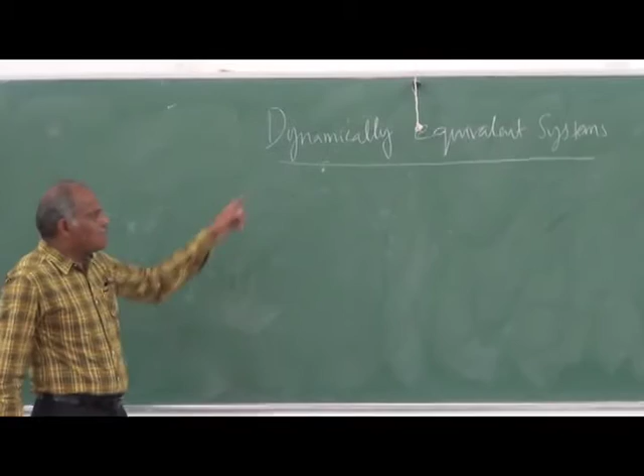Now the next topic, I will be taking a few topics which may appear disconnected, but I will connect it later. One of the important concepts is dynamically equivalent systems.

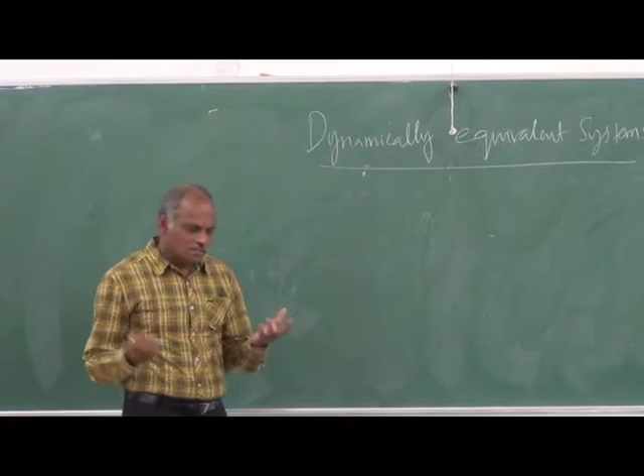But before discussing dynamically equivalent systems, we should philosophically understand what equivalent systems are. When you say something A and something B are equivalent, A is something, B is another thing, when you say two things are equivalent...

So suppose on the weekend you are traveling to your hometown, you have booked a train ticket, you got a lower berth in S4 coach, your friend got a lower berth in S5 coach. Are they equivalent or not? Is it going to differ in experience or time? You have a lower berth, the other person also has a lower berth, but the coaches are different, or even in the same coach you can have two lower berths. If there's a possibility of exchanging the ticket, will you get any benefit? No. So you can say both are equal.

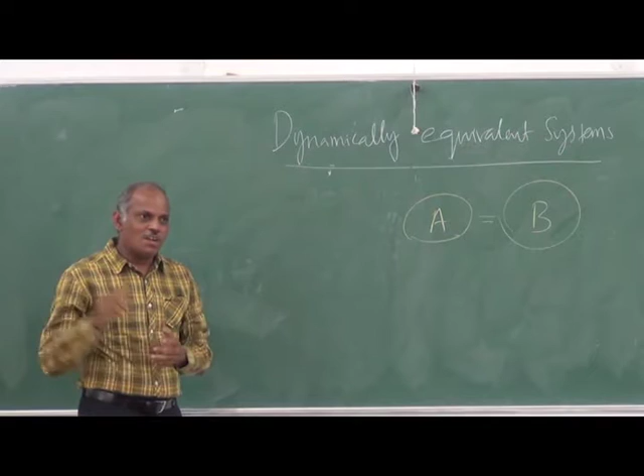But in the same train, if one of you has a second AC ticket and the other has a sleeper class ticket, will you exchange it? No.

You want to travel from here to Chennai, different modes are there. You can go by car, by train, or if you are crazy enough, by air. The half hour travel has a check-in time of 2 hours, and after check-out another half hour. So can you say traveling by all these modes is equal? From here, Trichy, to Chennai by different modes, are they equal? No.

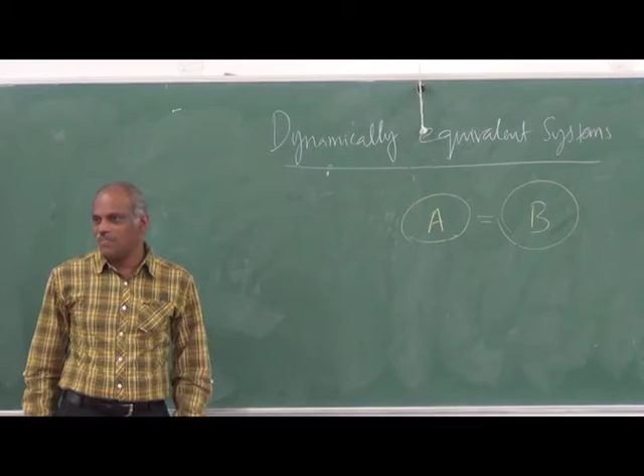Then when do you say they are equal? You have a bank account in State Bank, you can have a bank account in Canara Bank, a savings bank account in each. Are they equal or different? They are equal because they offer the same net banking facility, the same interest rate. When they offer same facilities of operation and same interest rate, they are equal, unless one of the banks goes bust, which nobody can predict right now.

So when you say two systems are equivalent, there is a philosophical basis, only then can you say it is equivalent. Your seat in mechanical engineering at NIT and production engineering at NIT are not equivalent. Metallurgy at NIT is not equivalent. Or mechanical here at NIT versus mechanical at Karaikal are definitely not equivalent.

But getting a seat here, whether your seat or your friend's seat in mechanical engineering, same section, is the same. So you can say two systems are equivalent by looking at something: you give some inputs and you have some output. If they are the same for both A and B, you can say it is equivalent.

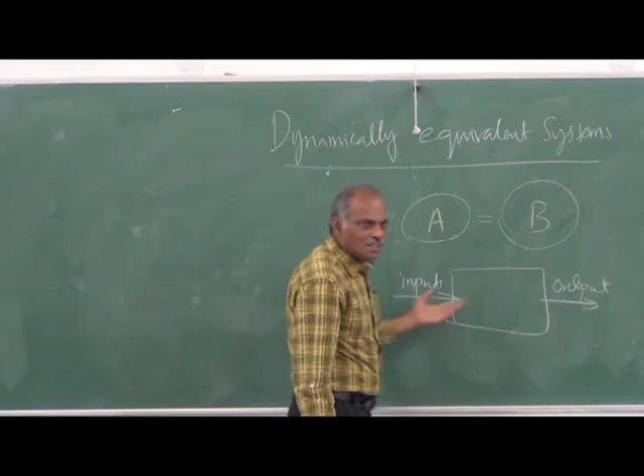Traveling by train, sleeper class, lower berth, in the same coach or different coach, are equivalent because the travel time is same, the money spent is same, the comfort level is same. So for the money you have paid, the outputs are also same, you can say it is same. So State Bank savings account or any other bank's account, if they give the same interest rate and same operational benefit, they are the same. So you can say two things are equivalent if whatever you give in and the output you get are the same, you can say they are equal.

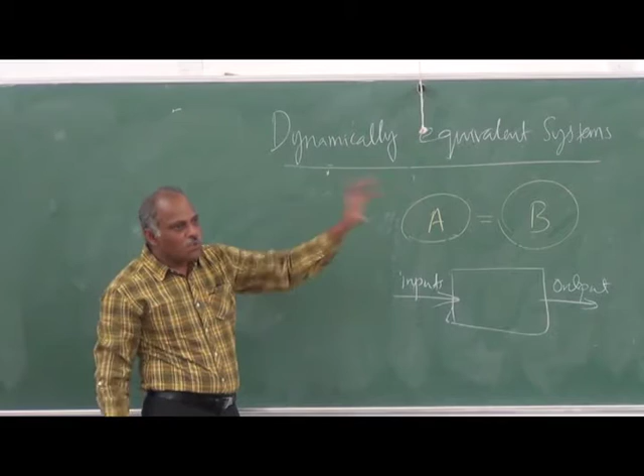So after getting a degree here, you get a job say in Maruti. A person who studied in a self-financing college also gets the same post in Maruti. Then you can say the effects are the same. So as per the effect, whatever degree you obtained and that person obtained, the outcome is the same. So equivalent systems are the ones which, for a given input, produce the same output. You can say they are equivalent.

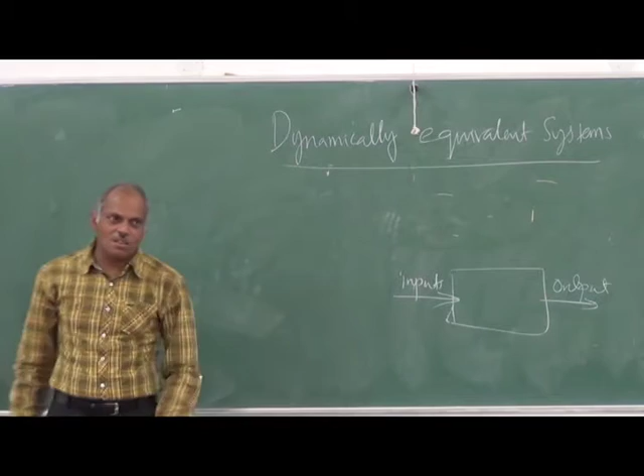But here we are talking about dynamically equivalent systems. When can you say two things are dynamically equivalent? Coming back, for a given input it should produce the same output, that is the dynamically equivalent system. Suppose I take some awkward looking rigid body and I have a nice looking model of this, these two are to be dynamically equivalent.

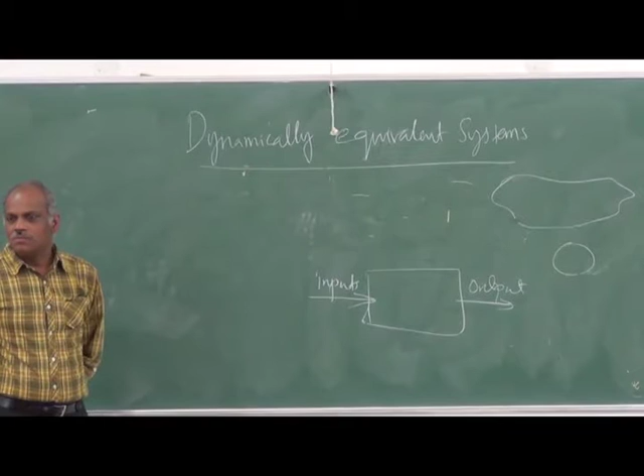For a given input, it should produce the same output. So in a dynamic system, what is the input, what is the output? Forces. If you apply force to either of the bodies, it should produce the same acceleration, then they are equivalent. For example, in translation, forgetting about other things, if you're looking only at the translation aspect, 1 kg of steel with 1 kg force applied will produce the same acceleration as 1 kg of cotton.

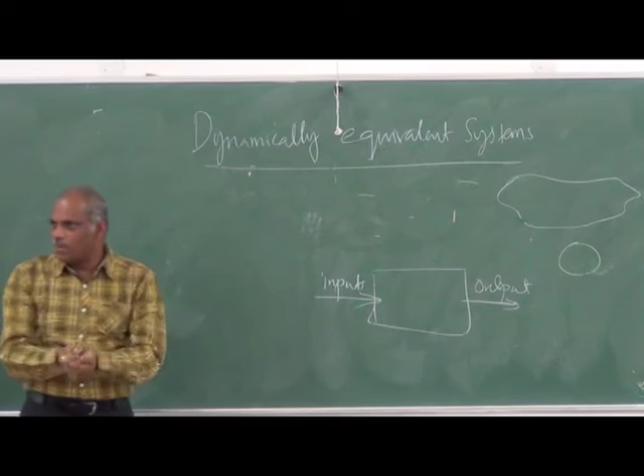1 kg of lead or 1 kg of gold, applied by 1 kg force or 1 Newton force, will produce the same acceleration. Then all are equal. 1 kg of cotton or 1 kg of this thing, dynamically they are equivalent because for a given force it produces the same acceleration.

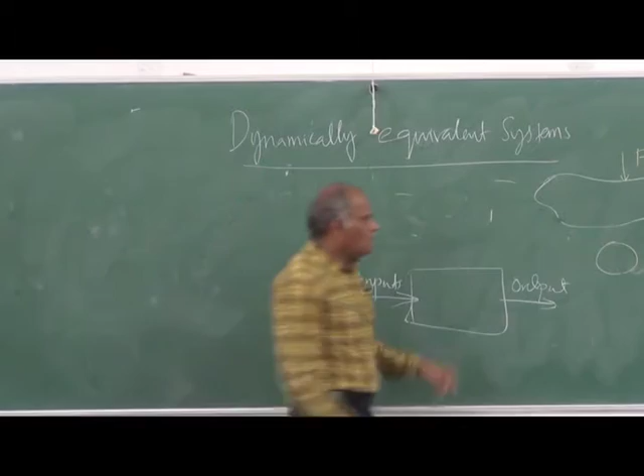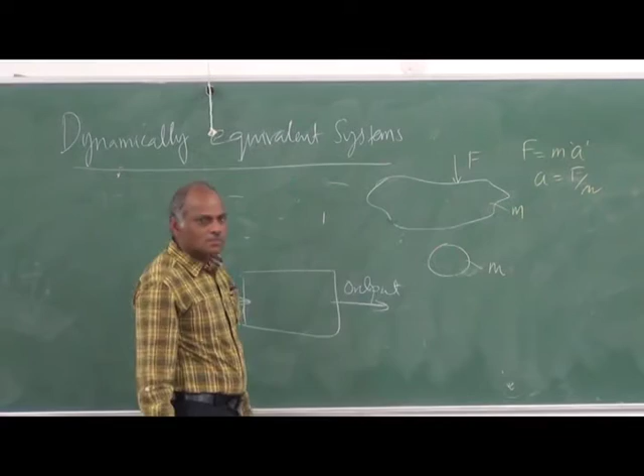But if I apply a force to this rigid body, knowing the mass, F equals ma, I can find the acceleration. A equals F by m. So if the mass of this is also the same, then you can say these two are dynamically equivalent as far as translation is concerned.

But another thing, does the point of application of force matter or not? It matters, because if I apply the force through the center of gravity, it will only suffer translation. But if the force is applied elsewhere, away from the center of gravity, it will translate as well as rotate.

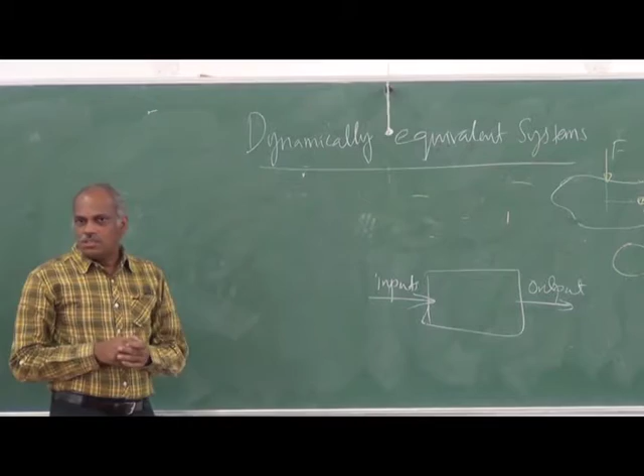So the effect is, for a given force, through the center of gravity it produces only translation, but away from it, it produces translation and rotation. So if this is to be equivalent to that, its center of gravity also should be the same. So with a single mass concept it is not possible. So what we do is think of two masses.

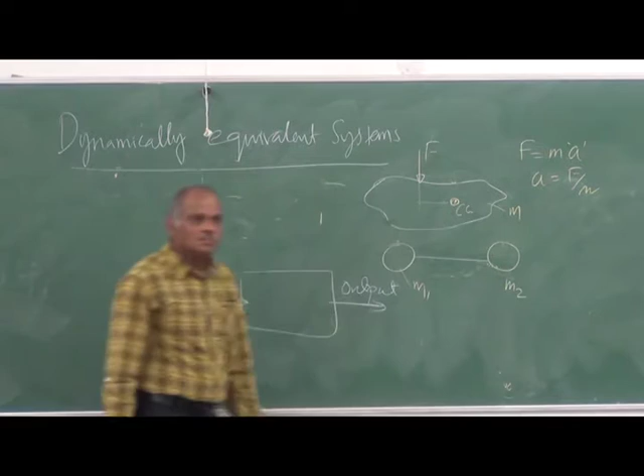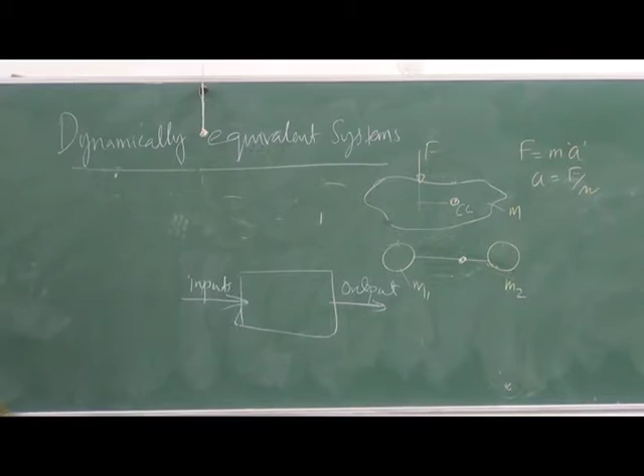They are connected like this. Then if their center of gravity and this center of gravity are the same, it will produce the same effect — if I give the force through the center of gravity for this, also through the center of gravity for that. If it's slightly away, at the same farther distance, it will produce the same effect. So if a force is applied on this, it should produce the same linear acceleration.

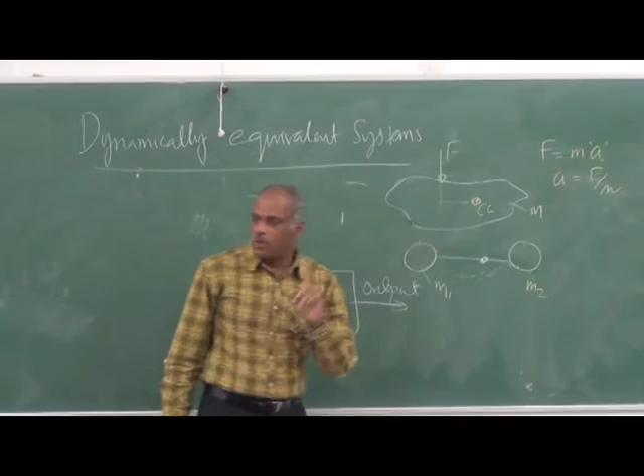That is one point. So therefore, if two systems are to be dynamically equivalent, their masses should be same. So we can say the first condition is that m1 plus m2 should be equal to m. Then only it will produce the same linear acceleration for a given force.

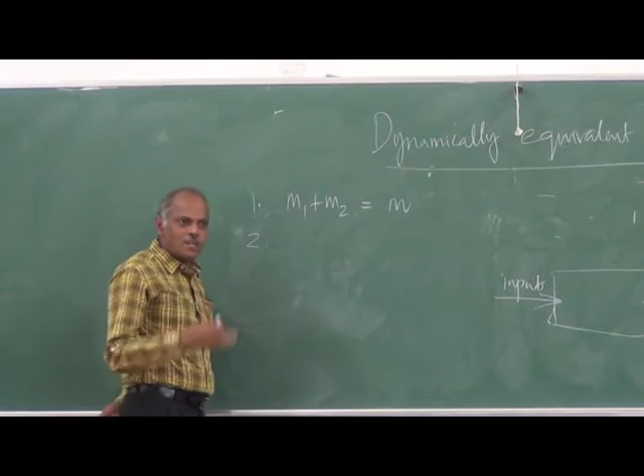Then the second condition is the center of gravity should be the same. So if I take this distance as h1 and this distance as h2, m1 h1 should be equal to m2 h2. Then only the center of gravity will be the same at this point.

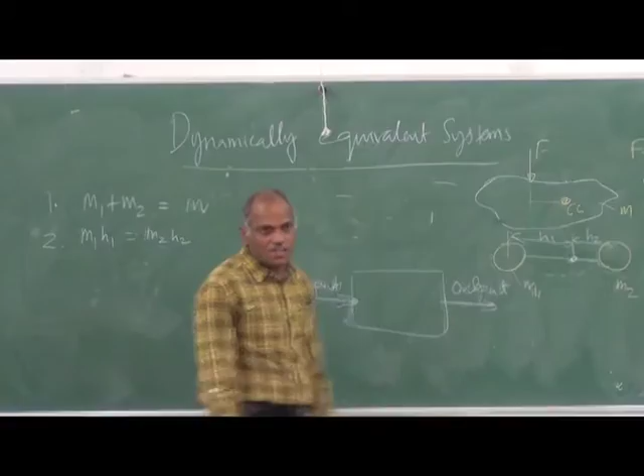Then the third condition is that when it is displaced away, there will be a force acting through it and there will be a torque. For the torque, it should produce the same angular acceleration. So for a dynamic system, the outputs are linear acceleration and angular acceleration. The inputs are force and torque or anything.

It should produce the same linear acceleration and angular acceleration. If you produce the same angular acceleration, the moment of inertia through the center of gravity for both bodies should be the same. So the third point is m1 h1 squared plus m2 h2 squared. Because this is a concentrated mass, the radius of gyration can just be the distance from there. So m1 h1 squared plus m2 h2 squared is equal to mk squared.

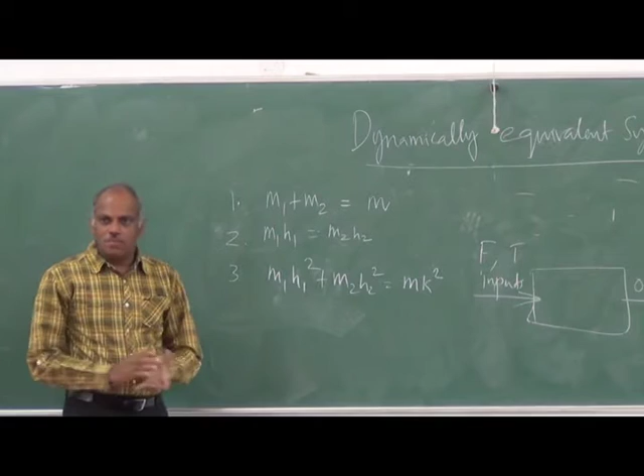If these three conditions are met, then both the bodies will produce, for a given force, the same linear and angular acceleration. Therefore, they will be equivalent.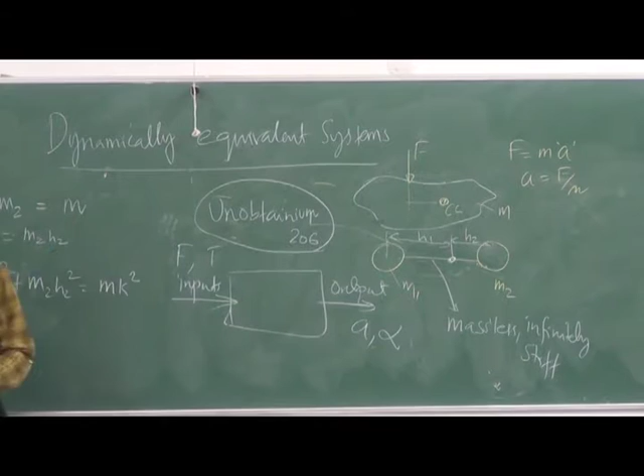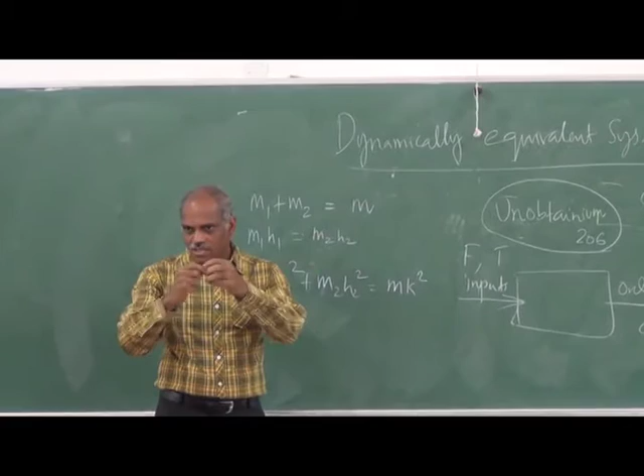To dynamically model an equivalent system with two simple balls, it should be connected by a massless, infinitely stiff material. Which material has such a property? It is unobtainium 206.

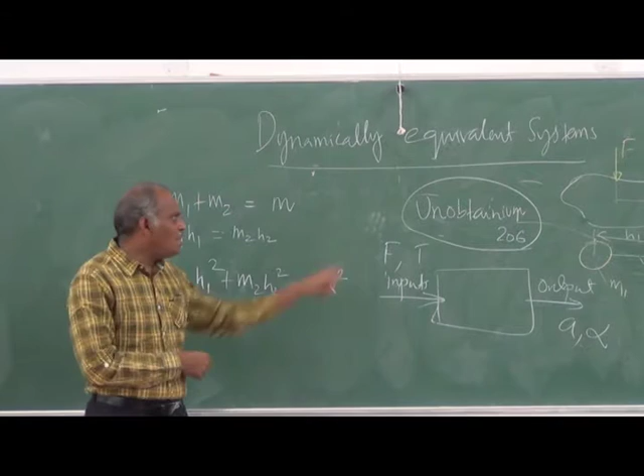What is unobtainium? It is a fictitious material used in fiction. Suppose I want a material which has zero mass and infinite stiffness — then you can say it can be obtained by a material like this. So in fiction, if you want to depict a material with ideal qualities, it can be stated as unobtainium.

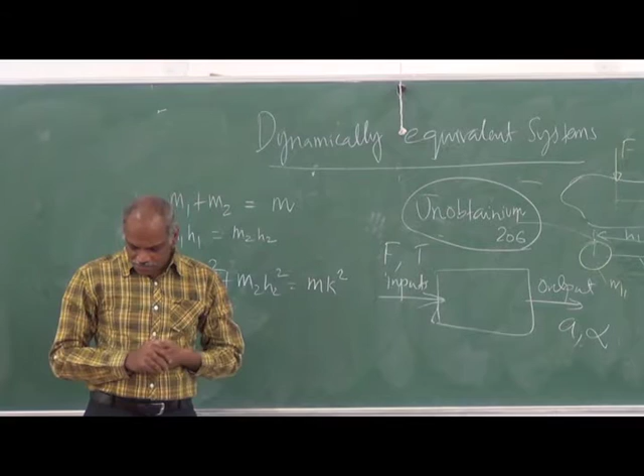Basically, an unobtainable material. Interestingly, this is the name given for a material which would have superconductivity at room temperature, to solve the energy problem of Earth. There is a movie by James Cameron called Avatar.

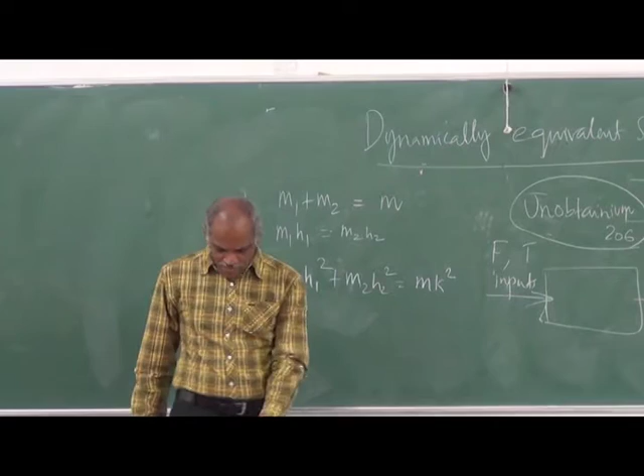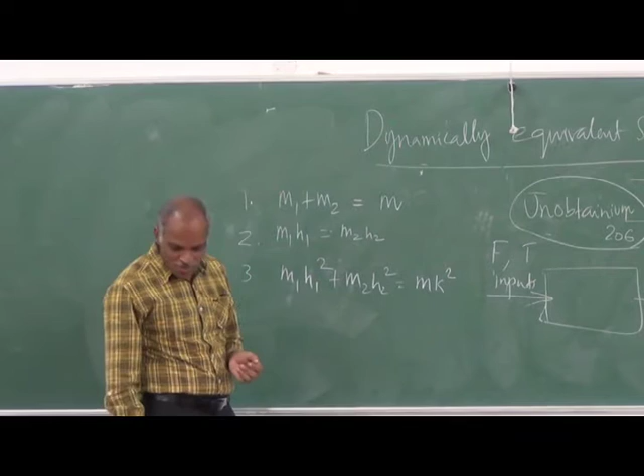I think most of you would have seen the movie. So human race goes to a planet called Pandora to obtain this material. That material, the name of the material is unobtainium, which is supposed to have this fictitious property of superconductivity at room temperature. Norton, in his book, when he writes about the dynamically equivalent system, writes that this is connected by a material made of unobtainium 206. So this is an imaginary thing.

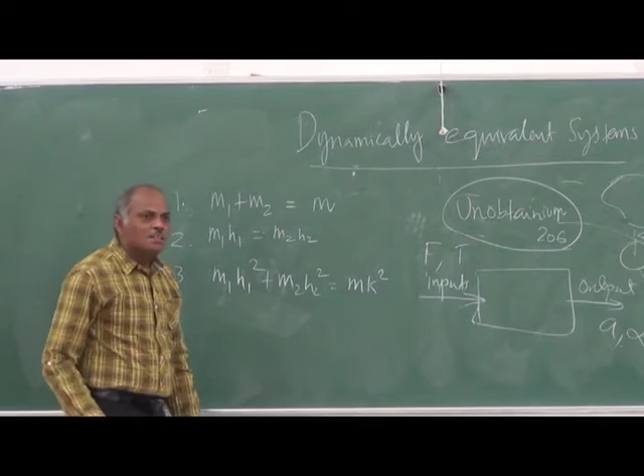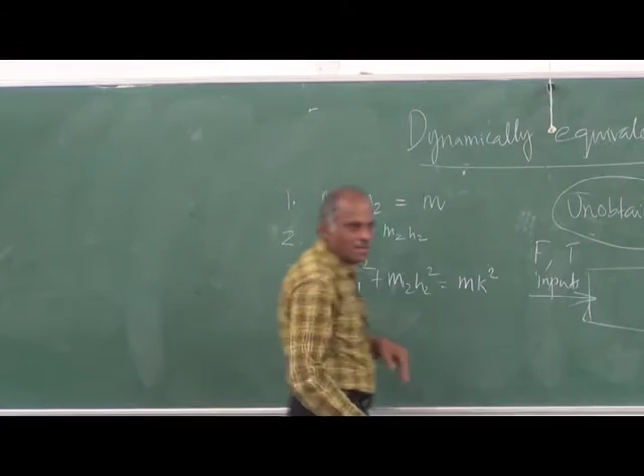Now you are clear about how these three equations have come. One is for the linear acceleration - for a given force, the linear acceleration must be same, so mass must be same. The point of application is critical, the center of gravity should be same, that's why this has come. Then for a given torque, the angular acceleration must be same, so the moment of inertia of these two must be same.

If these three conditions are met, you can model a rigid body into an equivalent system. So in your lab exercise, you are asked to find out the dynamically equivalent system for this connecting rod - you have to find out these distances and the masses. If you assume one of the masses, you can find out the other two.

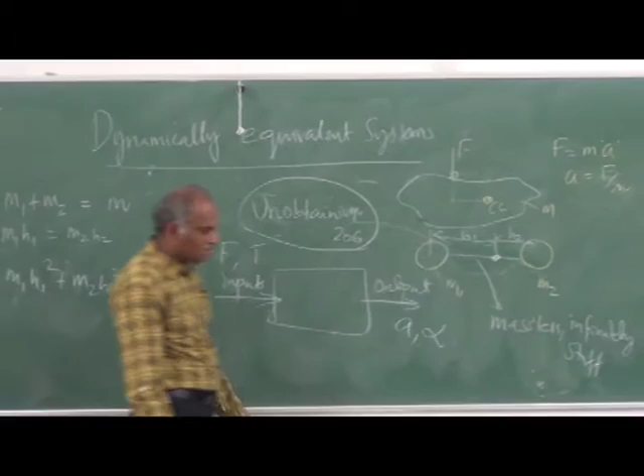But we will go a few more steps on this calculation to find out some property, the relationship of K and H1, H2.

So I will substitute this equation here. Write it like this: M1, H1. Instead of H1, I will write it as M2, H2 by M1, plus this M2, H2. Instead of the other H2, I will write M1, H1 divided by M2. That is equal to M K square.

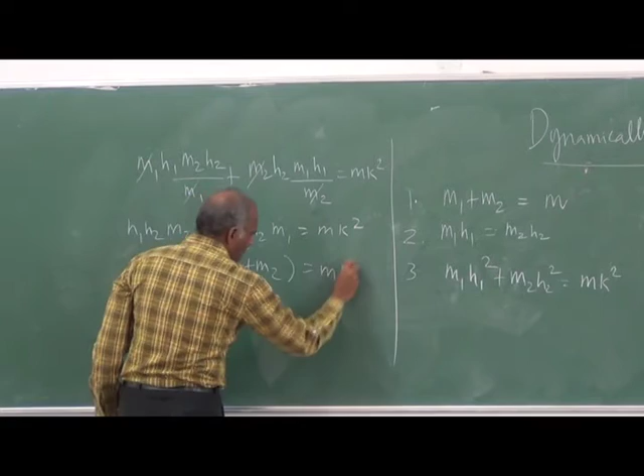So this M1 will go away, this can be cancelled. So you have M2, H1, H2, M2 plus H1, H2, M1, that is equal to M K square. So I can take H1, H2 out - M1 plus M2, that is equal to M K square. So M1 plus M2 is nothing but M, so this can be cancelled. So you have K square is H1, H2.

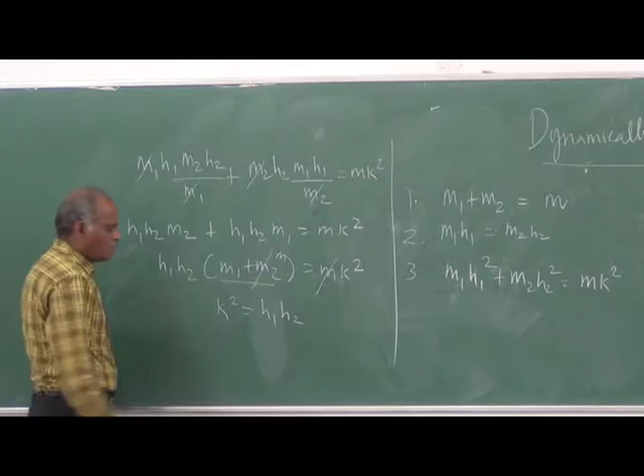K square, that is the radius of gyration, square is equal to the product of the distances at which the two masses are placed. So why is this required? I will keep it in this form.

This particular step of reaching this result, we did in maybe 2-3 steps. In some Indian author books, this particular stage takes 20 steps - they substitute, resubstitute like that. So this simplified form of substitution to get this result, I attribute to Professor Sudhakar, because when we were discussing, he brought this very simple form, so many steps can be eliminated.

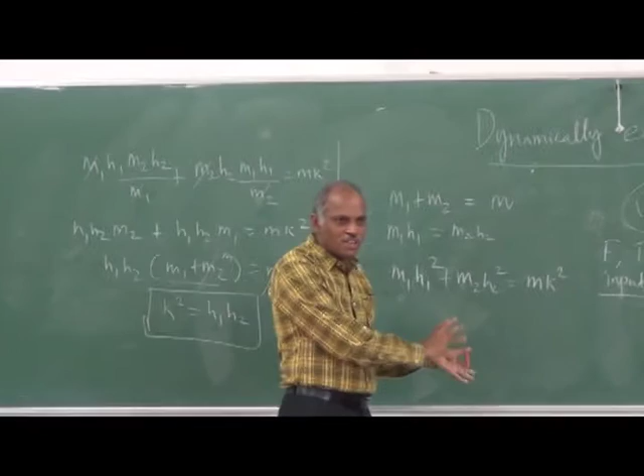So this is the discussion about the dynamically equivalent system. We are going to use it later on, but this is the concept. So we discussed what is an equivalent system in the first place, what is a dynamically equivalent system, what are the conditions, then we have brought in this particular form.

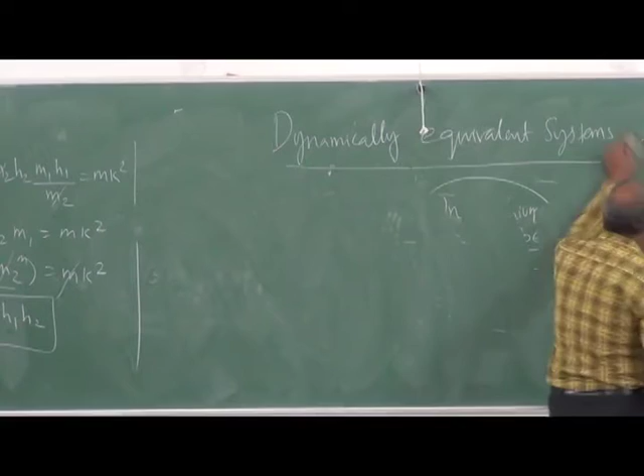Now for this day I will take one more topic and stop. So that topic also may look disjointed or unconnected, but later on we will connect it. So that is center of percussion.

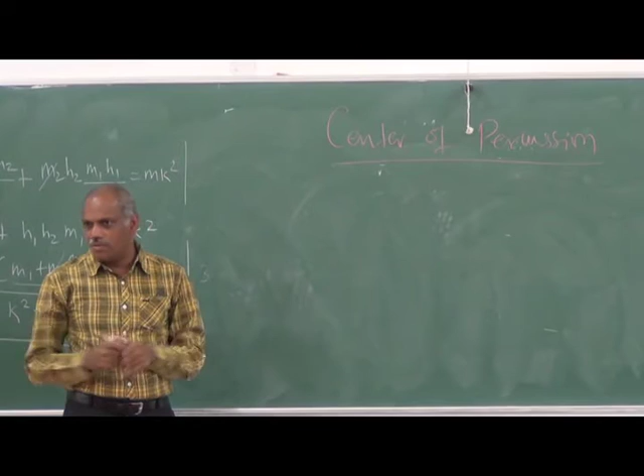The term percussion relates to impact. You know that you have percussion musical instruments - the mridangam is a percussion musical instrument, where we impart force. So there is a concept called the center of percussion. What is the center of percussion?

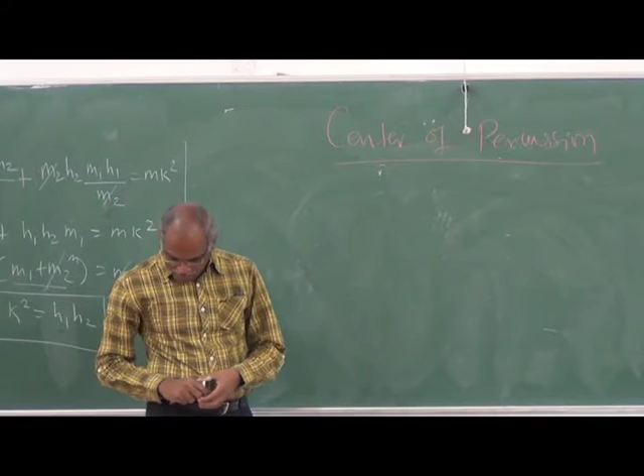It is a point on a body which, when struck with a force, will have associated with it another point called the center of percussion, or center of oscillation, where there will be zero reaction. So what is that statement?

Say if suppose I have a body like this, I can apply a force here, here, here, or anywhere. When I apply a force, say this is my point of suspension. If I choose a point and apply a force, then there will be zero reaction here. That point is called the center of percussion and center of oscillation.

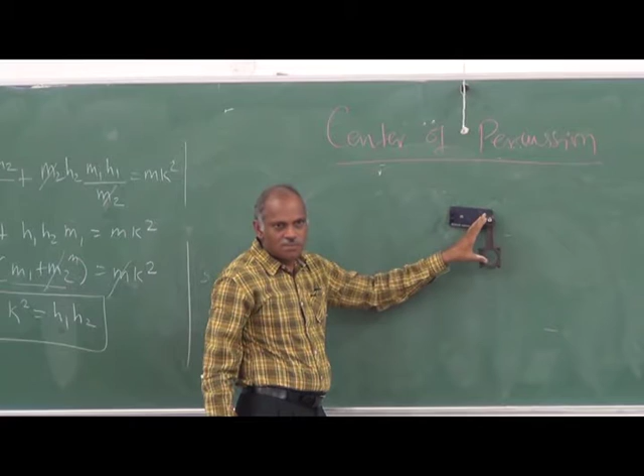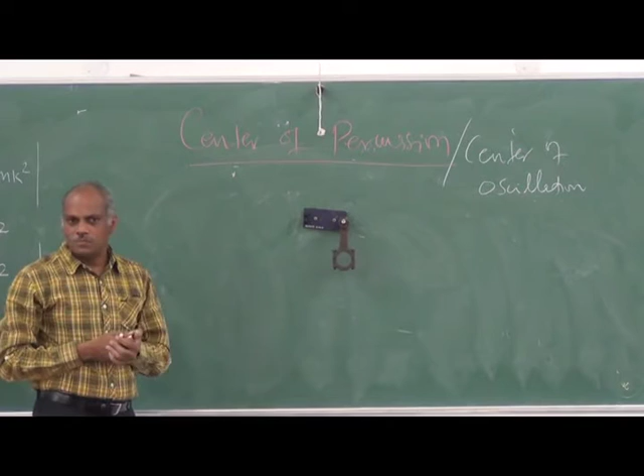They are pairs - the center of percussion and the center of oscillation are pairs. So if you apply a force on the center of percussion, the center of oscillation will have zero reaction. If you reverse it, they will reverse their position. So what is that?

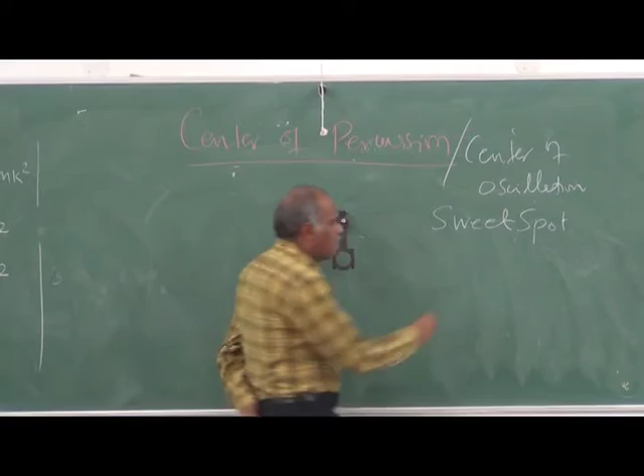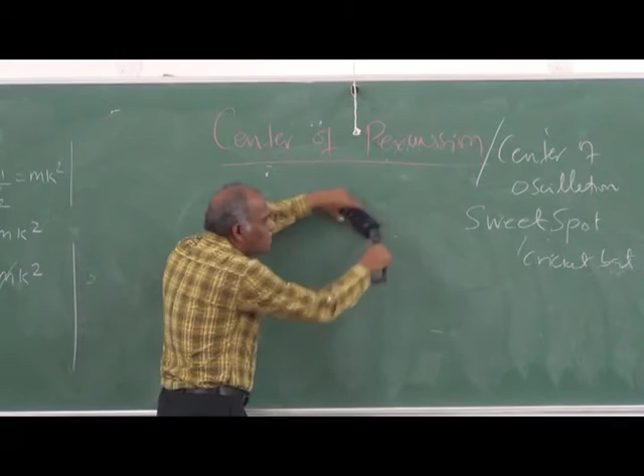Center of percussion is also called the sweet spot. In case of a cricket bat, or a golf club or a shuttle bat, you have some place called a sweet spot. If you hit it, you will not have any reaction - it's so easy for you to handle the bat. So what is that? That is the center of percussion. We will first derive the equation for that.

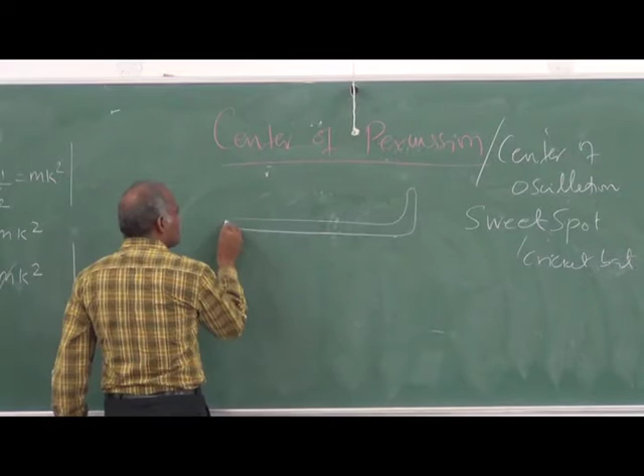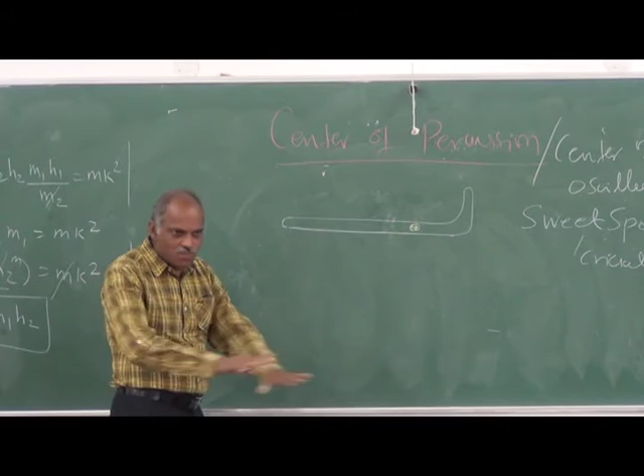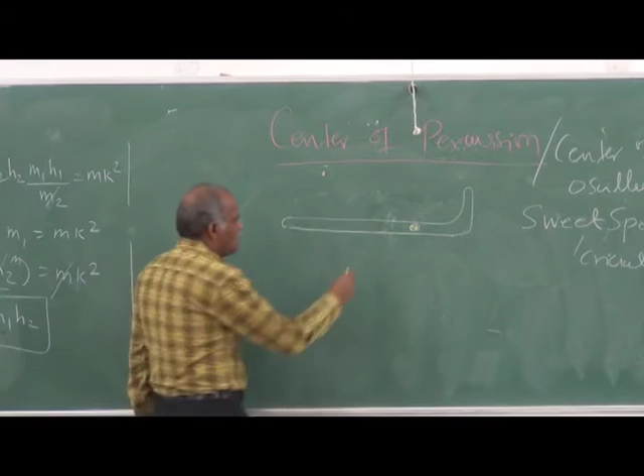You take a hockey stick, the center of the hockey stick is, say, the center of gravity is this. To remove the effects of friction, I keep this hockey stick on an ice floor. It is not uncommon in Western countries to have ice hockey - ice hockey is played on an ice floor, so it is so smooth that friction is very, very minimal. So I put a hockey stick on the ice floor and apply a force here, somewhere away from the center of gravity. This distance I call h1.

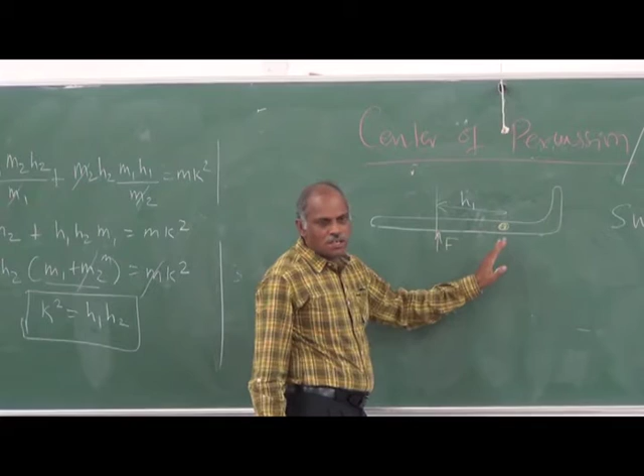Now what kind of motion will this hockey stick undergo? Because it is not subjected to force through the center of gravity, it will undergo both translation and angular acceleration. Both translation and rotation it will undergo. So I am trying to find out the acceleration of each point due to translation.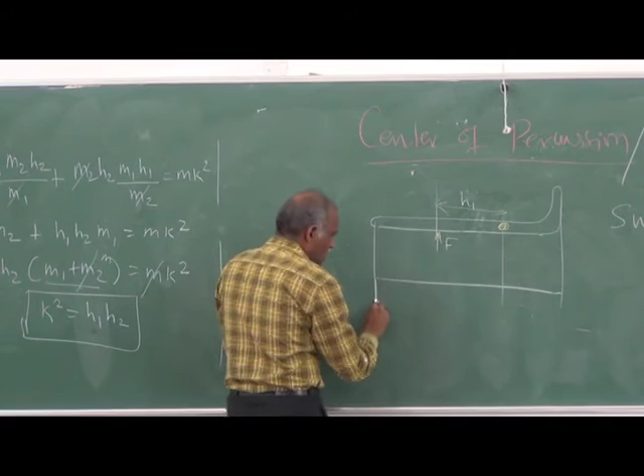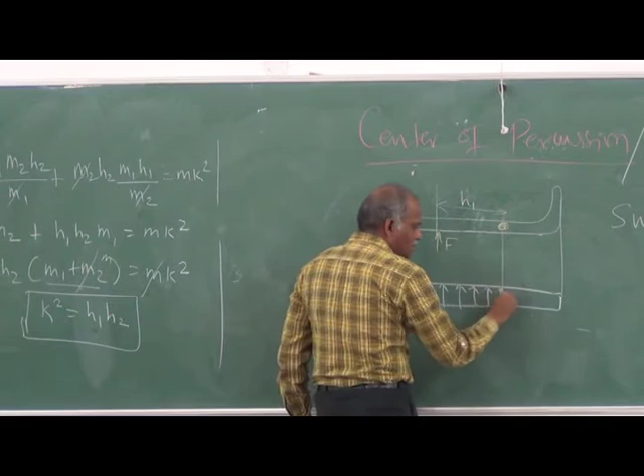So every point on this hockey stick will undergo a translatory acceleration, A, which is given by F by m. I am talking about every point. Every point will undergo the same acceleration, given by F by m.

Now look at the acceleration undergone by each point due to the angular acceleration. So if you take a point on this, suppose this is the point, depending on the distance and the angular acceleration alpha, you get the acceleration of that point. So that will vary linearly with the distance.

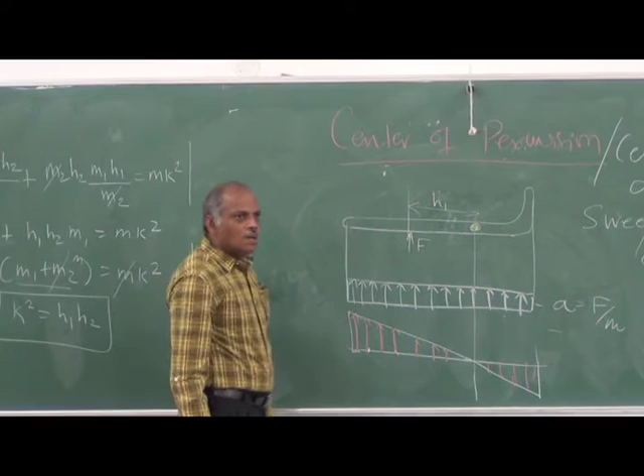Since it is going to rotate like this, the acceleration here is reversed because it is rotating about this CG. So for any point, the acceleration is given by that distance into alpha. This is the effect of acceleration due to translation, and this is the effect due to rotation, but they are not happening in isolation. Both are happening simultaneously, so I have to superimpose both acceleration diagrams.

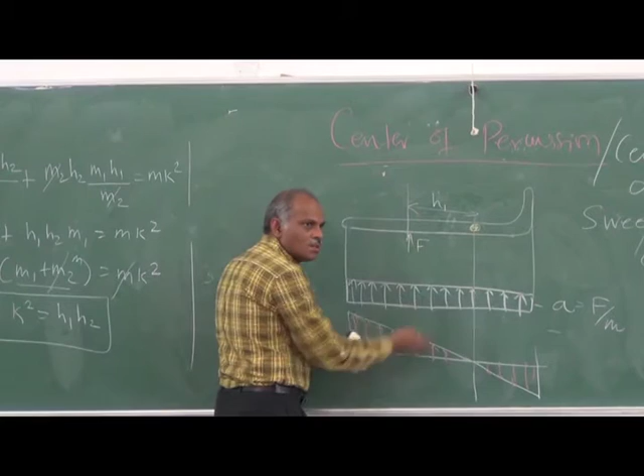So that is what I am going to do. I will superimpose this here, like this. Here you see that linear acceleration and angular acceleration are added together. In this part they cancel. So there you can find one particular point where the net acceleration is zero.

That point will not have any acceleration, meaning it will not experience any reaction. So when you hit it here, you can find a point which suffers zero acceleration, that is called the center of percussion. Okay, so this will be your sweet spot and you can put your handle here.

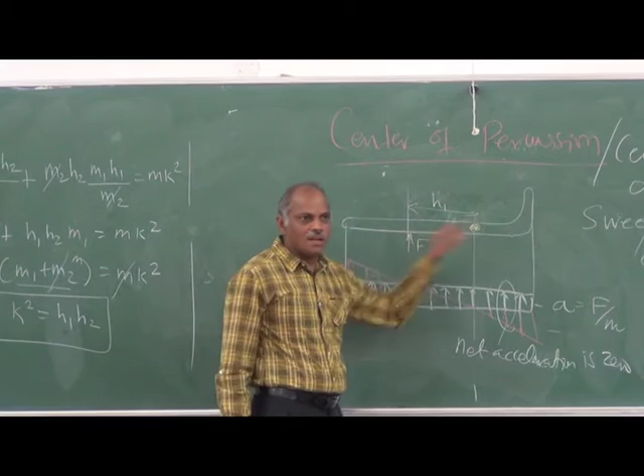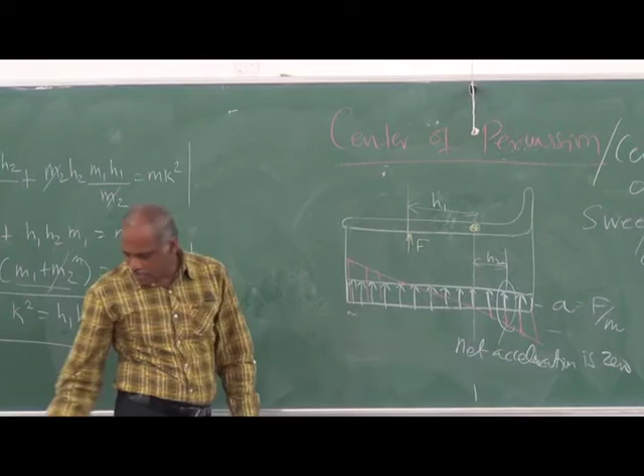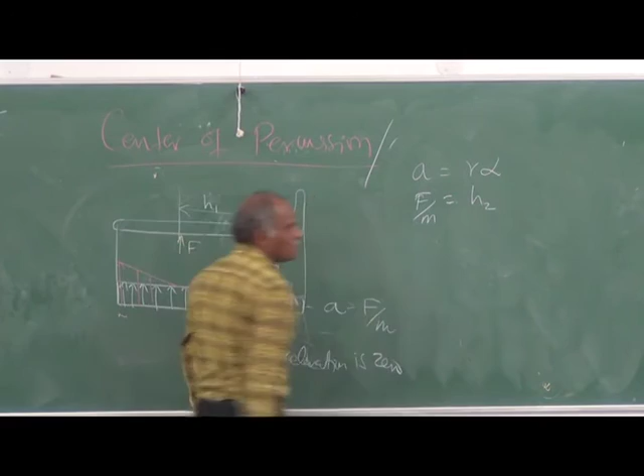So how to find this out? Suppose I take this part as h2. I can write the equation that the linear acceleration A is equal to the acceleration due to rotation. So here A is equal to F by m, the distance r is h2, then alpha is T by I.

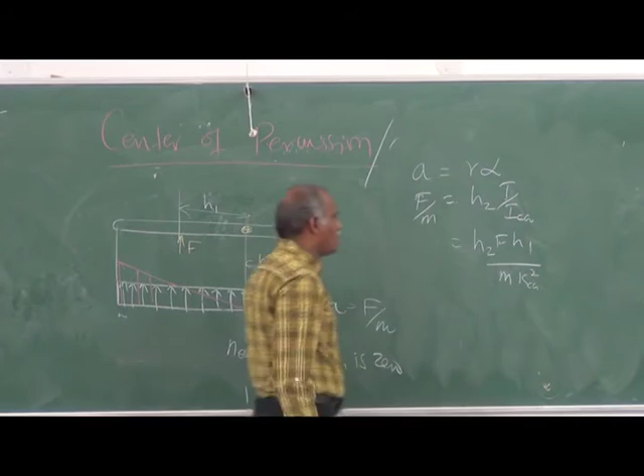This I is through the center of gravity, because now it is rotating about the center of gravity. So this I can write as h2 into torque, which is nothing but F into h1, divided by IcG, that is m into kcg square. This is F by m.

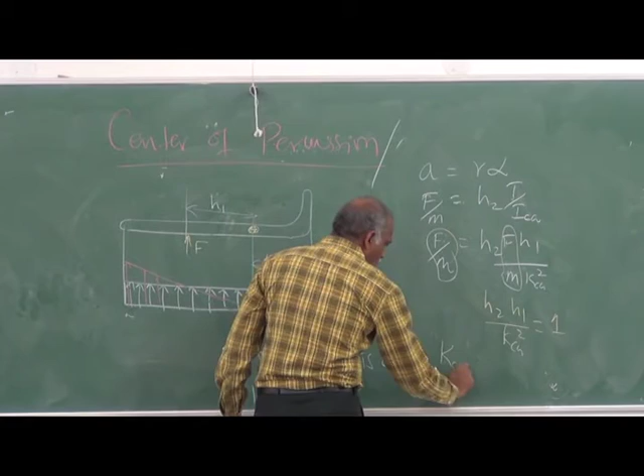Here you can find that F by m is on both sides, which can be cancelled. So what you will have is h2 h1 by kcg square is equal to 1. In other words, kcg square is equal to h1 into h2.

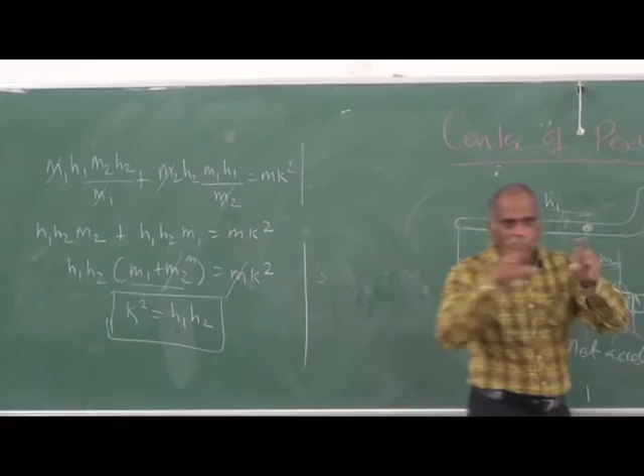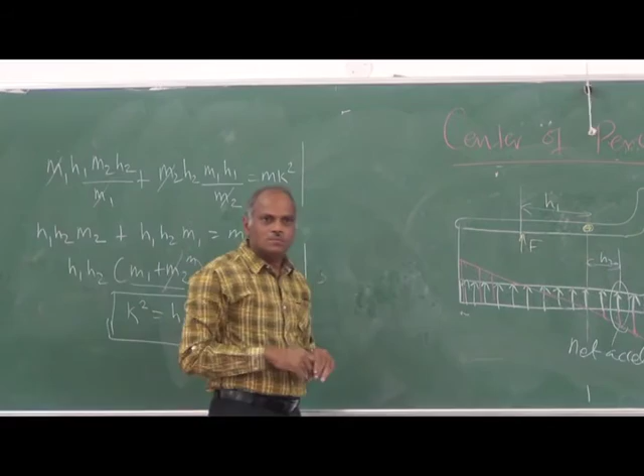So this is the concept of center of percussion. I have a body, apply a force, and find a complementary point called the center of percussion, which experiences zero reaction. So the equation is that the radius of gyration through the CG is equal to h1 and h2 - that is the distance where the force is applied, and the other distance is where the center of percussion lies.

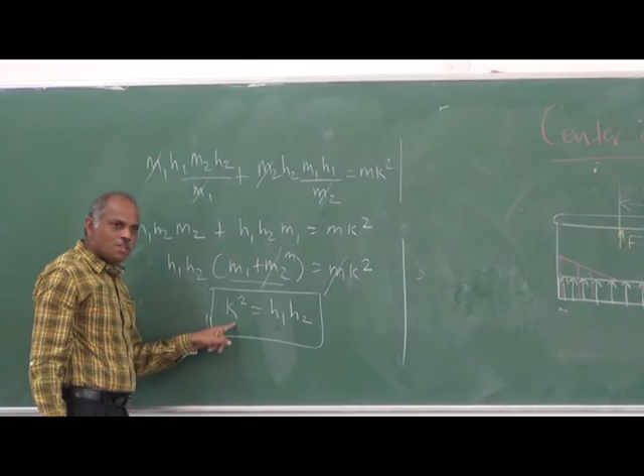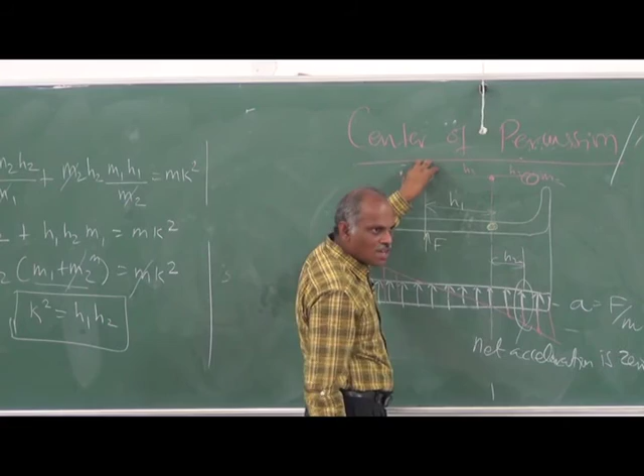Here, coming to the dynamically equivalent system, the same equation applies: k square is equal to h1 into h2. So in a dynamically equivalent system, this is m1, m2, this is h1, h2. If you take the center of gravity as the reference point, the dynamically equivalent system will have masses - one at the center of oscillation, another at the center of percussion.

Okay, so that is what this means. So what is its relation? I want to model a dynamically equivalent system. I have to place the two masses - where should I keep them? I can keep it at a point. So one of them will be my center of percussion, another will be the center of oscillation. Okay, so that is the concept.

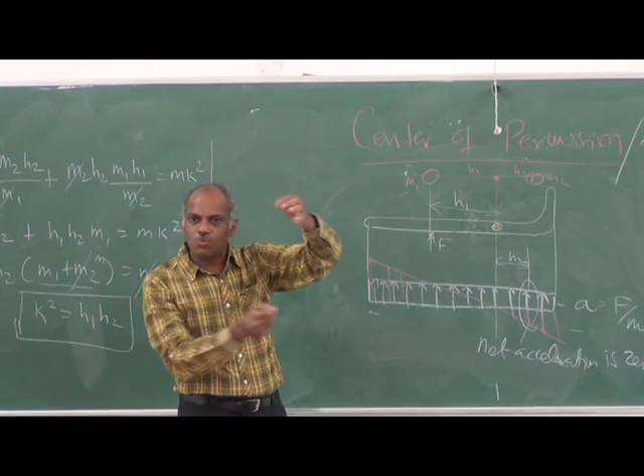So when you hit it there, you will not get any reaction. You can see beautiful videos implemented in your lab video session, where they take a baseball bat and hit it. When they hit it at a different place, it breaks, but when you hit the sweet spot, it simply rotates. There is no reaction. Okay, so you can feel that. Okay, we stop with that.